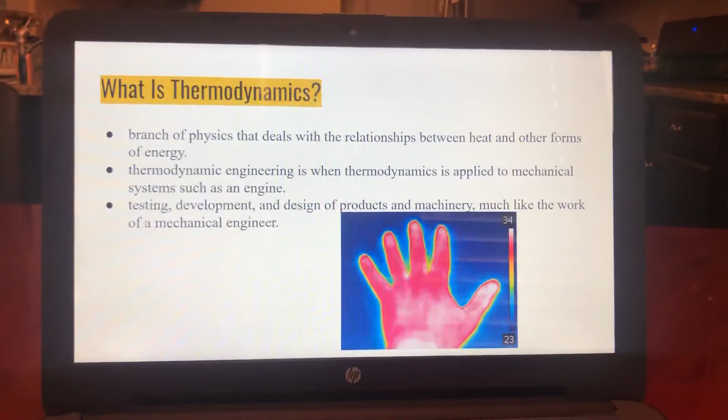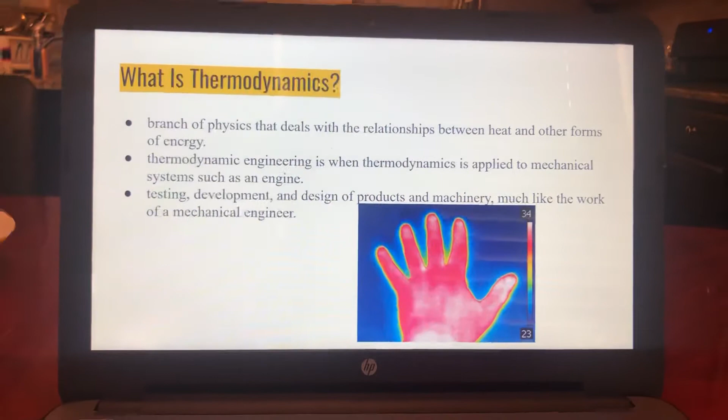Thermodynamics is a branch of physics that deals with the relationship between heat and other forms of energy. Particularly, it describes how thermal energy is converted to other kinds of energy and its effects on matter. Thermodynamic engineering is when thermodynamics is applied to mechanical systems such as an engine.

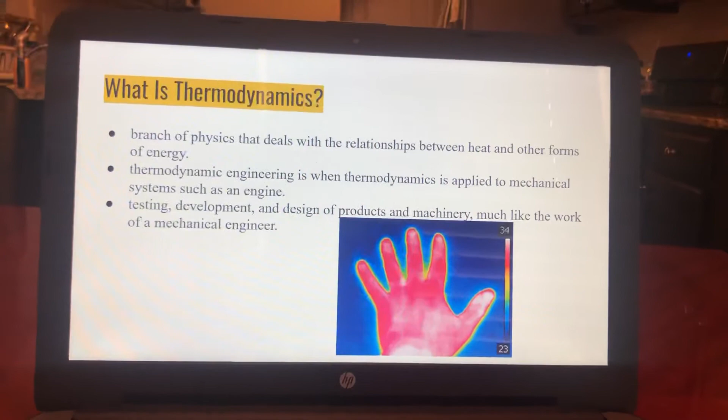Thermodynamic engineers are responsible for the testing, development, and design of products and machinery, much like the work of a mechanical engineer. Engineers are also in charge of evaluating a product for quality, safety, and cost.

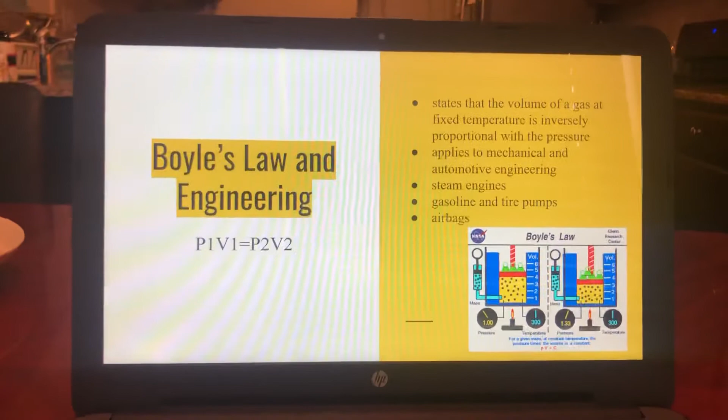There are three primary gas laws: Boyle's law, Charles' law, and Gay-Lussac's law. There's also an ideal gas law. Each law has a use or application in the fields of chemical, mechanical, or thermodynamic engineering.

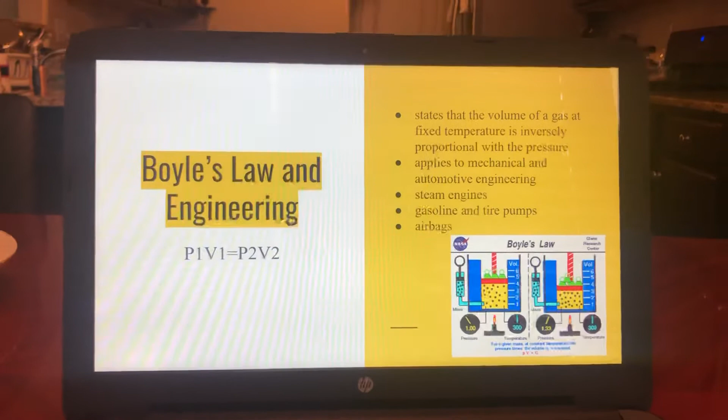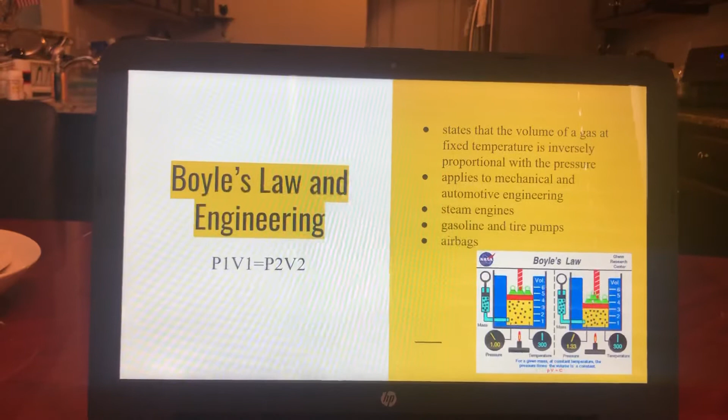Boyle's law was named after chemist-physicist Robert Boyle, who published the original law in 1662. It states that the volume of a gas at fixed temperature is inversely proportional with the pressure. Boyle's law is described using the relationship P1V1 equals P2V2, in which P is pressure and V is volume.

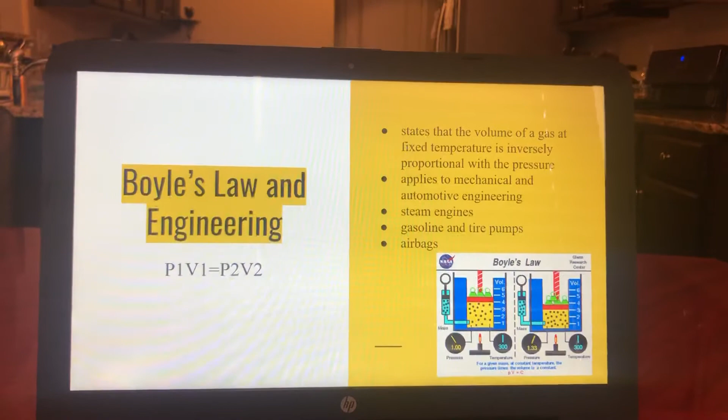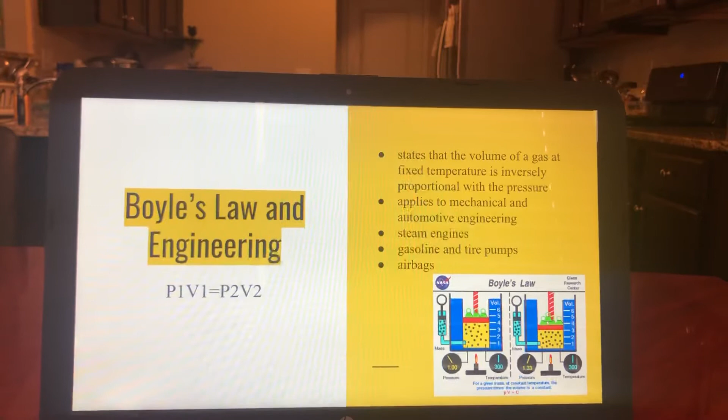Boyle's law applies to mechanical or automotive engineering. It's seen in steam engines, gasoline and tire pumps, and airbags. For instance, before an airbag expands, it's compressed and pressure is high. When the bag expands, the pressure decreases as the volume rises. So as the airbag increases in volume, the pressure decreases, and when the pressure increases, the volume decreases.

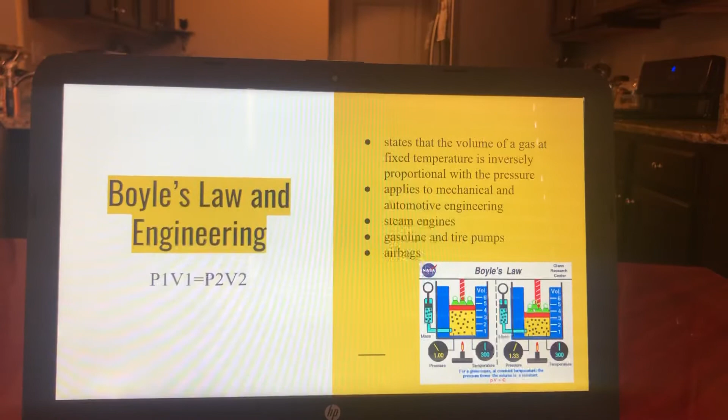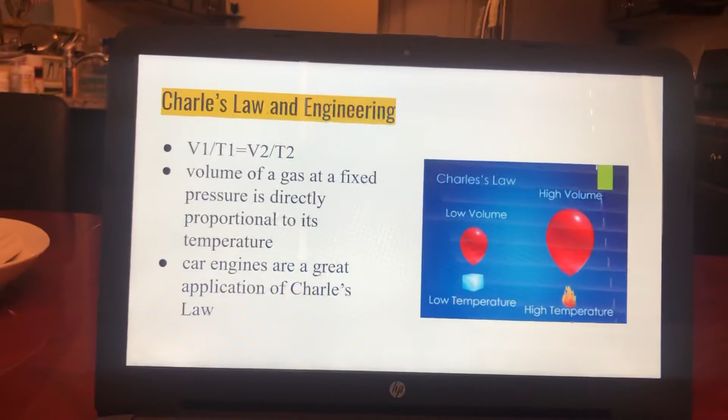Charles' law was discovered by French balloonist Jacques Charles in 1787. It states that the volume of a gas at a fixed pressure is directly proportional to its temperature. The relationship for this law is V1 over T1 equals V2 over T2, in which V is volume and T is temperature.

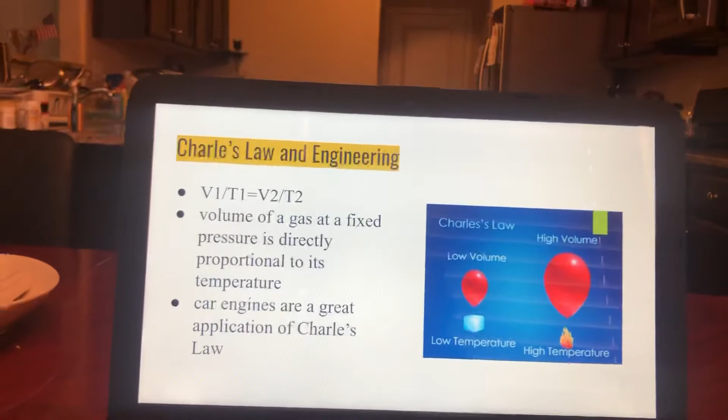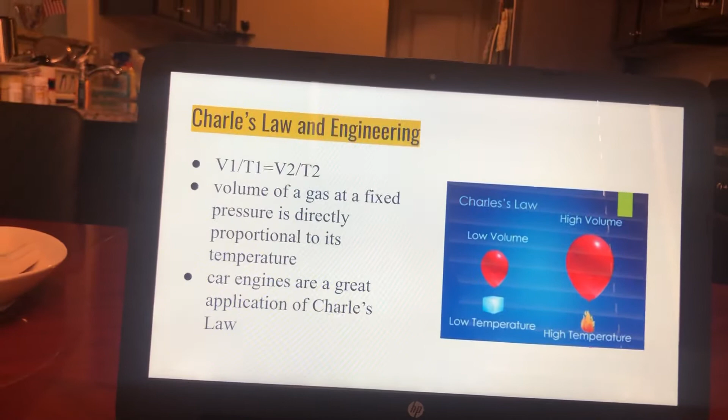Again, car engines are a great application of Charles' law. The heat from the combustion of the fuel causes the cylinder to expand, which pushes the piston and turns the crankshaft. Thus, Charles' law applies to engineering.

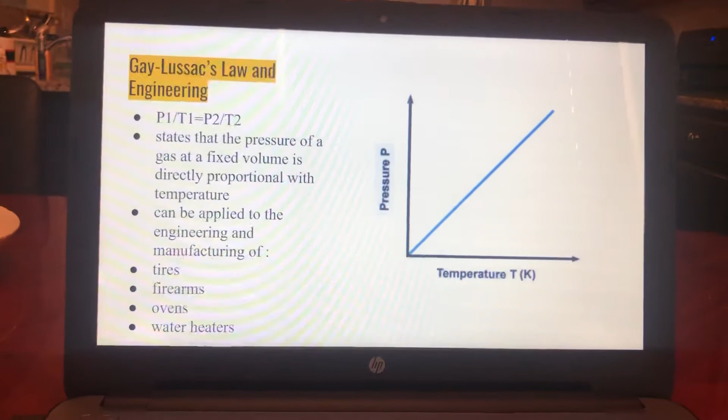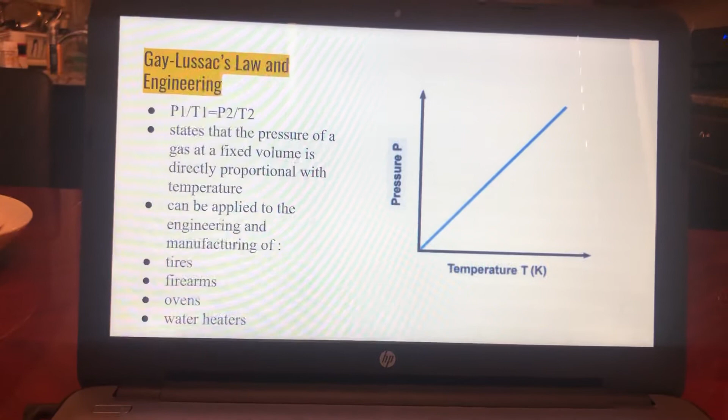Gay-Lussac's law was proposed by French chemist Joseph Gay-Lussac in the early 19th century. It states that the pressure of a gas at fixed volume is directly proportional with temperature. The law is described using the relationship P1 over T1 equals P2 over T2, in which P is pressure and T is temperature.

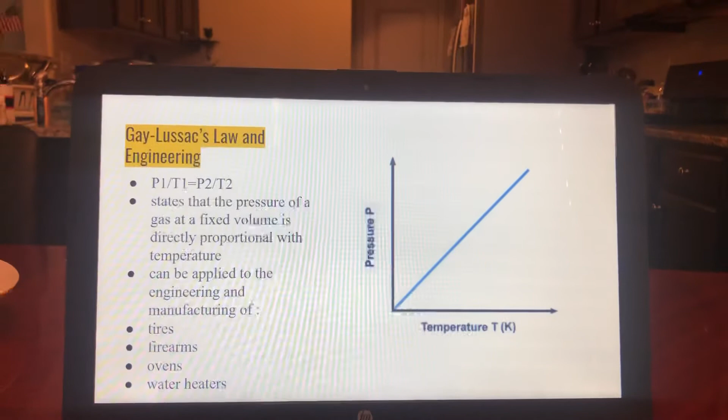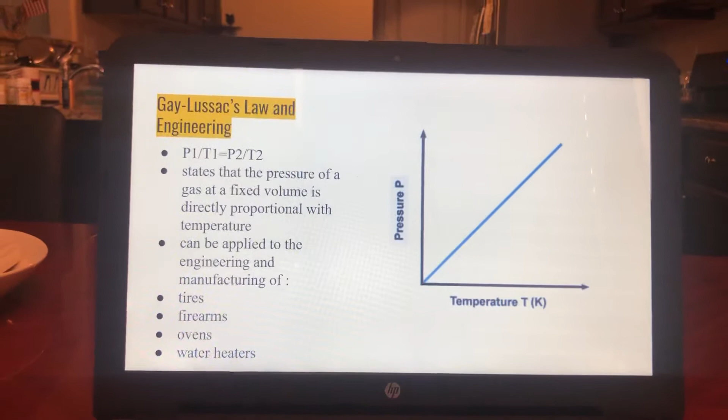Gay-Lussac's law can be applied to the engineering and manufacturing of not only tires, but also firearms, ovens, and water heaters. In a tire, when the temperature of the air rises, the pressure of the gas in the tubes increases. After an unbearable point, the tires fracture. The same thing happens with steam and a water heater. Therefore, Gay-Lussac's law is applicable to many objects and technology related to mechanical engineering.

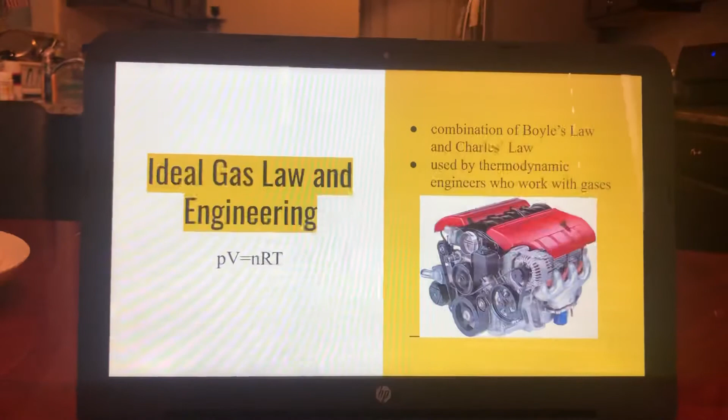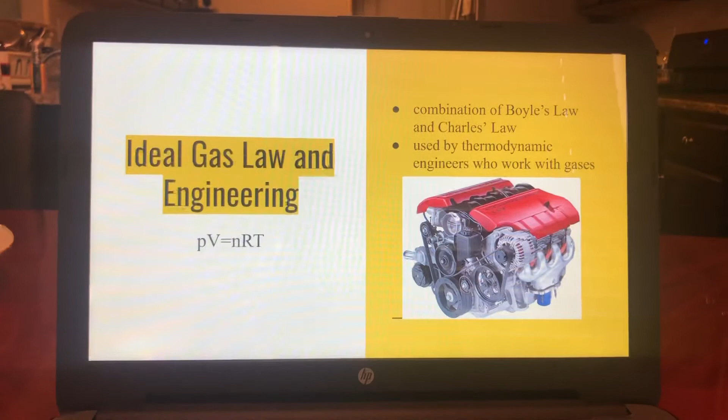The ideal gas law was first stated by Emile Clapeyron in 1834. It's a combination of Boyle's law and Charles' law. The relationship obtained is PV equals nRT, in which P is pressure, V is volume, n is moles, R is the ideal gas constant, and T is temperature.

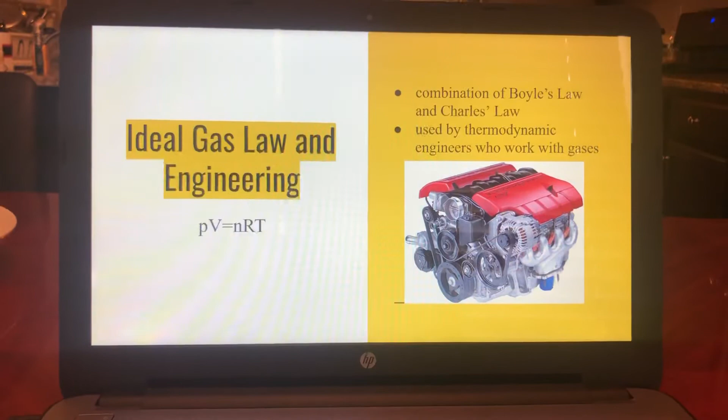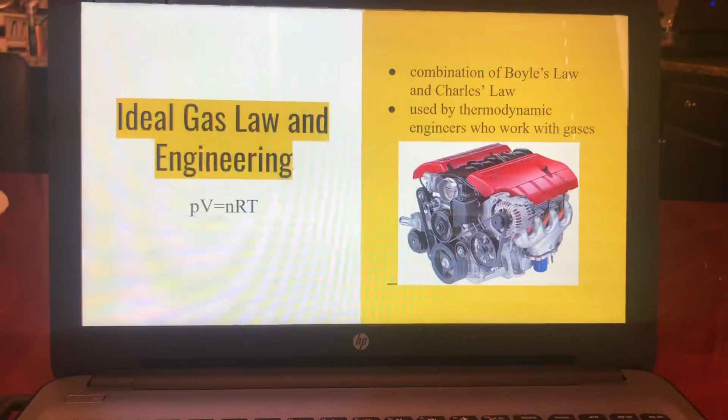Because it's simple to use and approximates real gas behaviors, the ideal gas law is used by thermodynamic engineers who work with gases. It provides important information regarding reactions, such as the gas produced in a reaction and the mixing of gases. It is even useful in determining the efficiency and standard operation of equipment, as well as the capacity of a storage container.

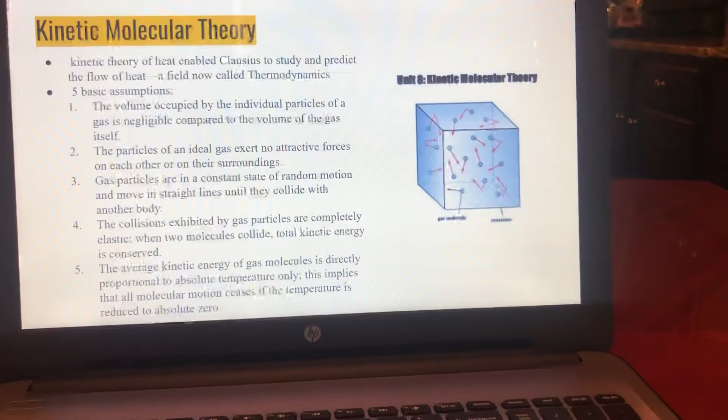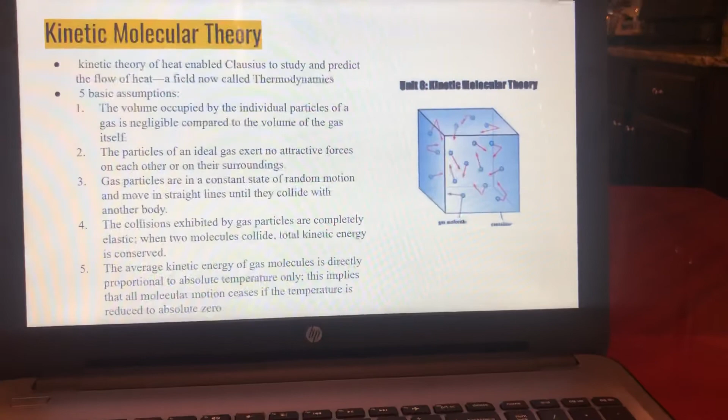The kinetic molecular theory, made in 1860, explains all of the gas laws. German physicist Rudolf Clausius proposed that heat is a form of energy that affects the temperature of matter by changing the motion of molecules of matter. This kinetic theory of heat enabled Clausius to study and predict the flow of heat, a field now called thermodynamics.

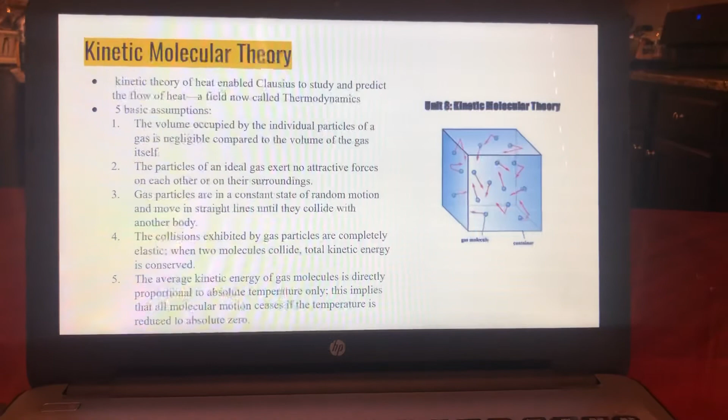As you guys know, because of class, the modern kinetic molecular theory has 5 basic assumptions, and they're right there.

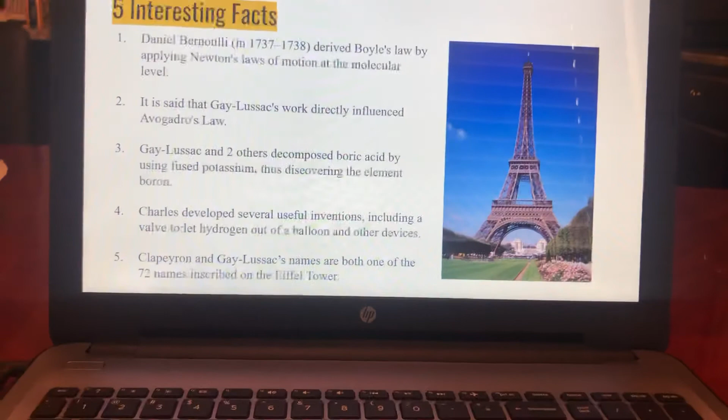In conclusion, I learned that gas laws and kinetic molecular theory are seen all around us, especially in cars. Engineers have to have a good understanding of the gas laws in order to know exactly what they're doing. I've also discovered a couple of interesting facts.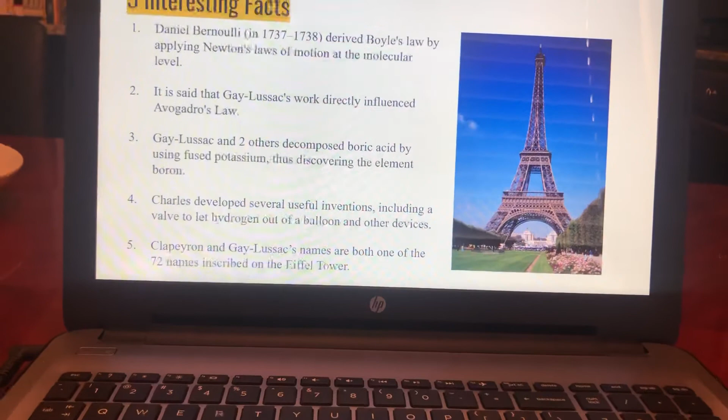One of them is that it's said that Gay-Lussac's work directly influenced Avogadro's law. I also learned that among other achievements, Gay-Lussac and two others decomposed boric acid by using fused potassium, thus discovering the element boron. And lastly, I learned that Clapeyron and Gay-Lussac's names are both among the 72 names inscribed on the Eiffel Tower.